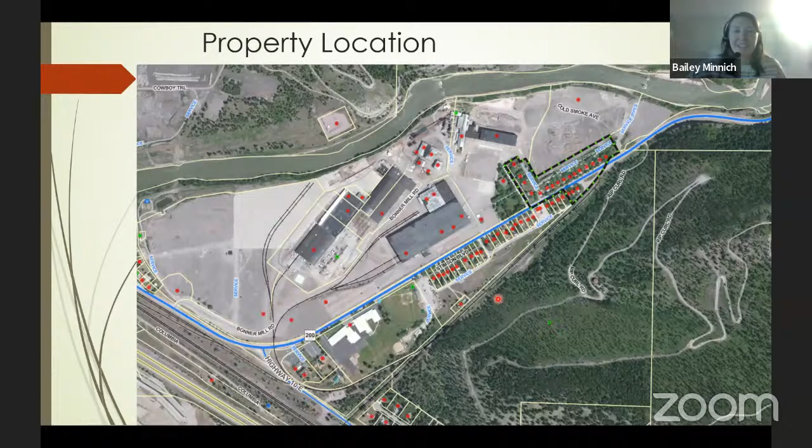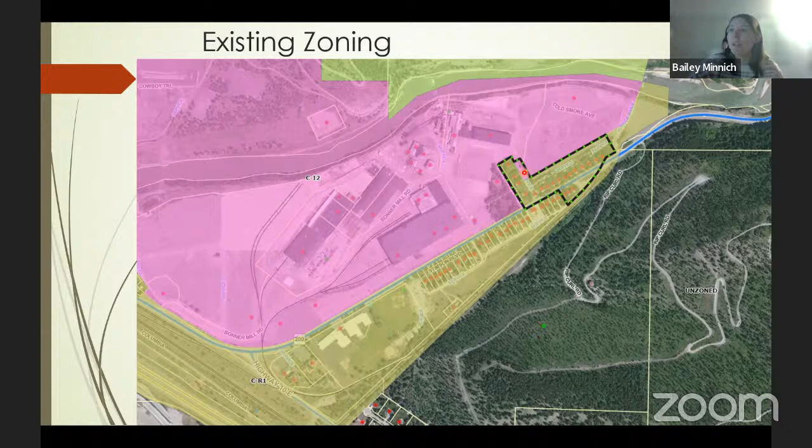The land use designation - so the 2019 Missoula area land use element, which is an amendment to the 2016 Missoula County Growth Policy, designates the property as neighborhood residential, which has a residential density of 8 units per acre or greater. And then the part that's zoned industrial has a heavy industrial center designation, which has building sizes ranging from moderate, at 20,000 square feet, to very large, over 150,000 square feet. Again, it's a tiny little portion of the property that I'll show in a minute. There's no buildings or anything on there, but it's interesting to know.

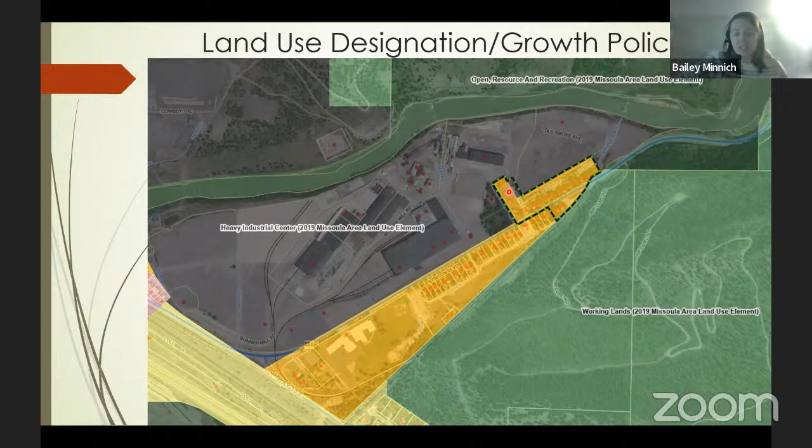Each of the lots have an existing home on them, constructed around 1925 as part of the Bonner Mill site development. There's an existing shared multi-user septic system, which will remain within the proposed common area, and all the lots are served by the Bonner Homes West LLC water supply. There is an existing alley that's located behind the homes on both sides of the highway, providing primary access to the lots. So the lots do front on the highway, but they do not have driveways or anything like that onto Highway 200.

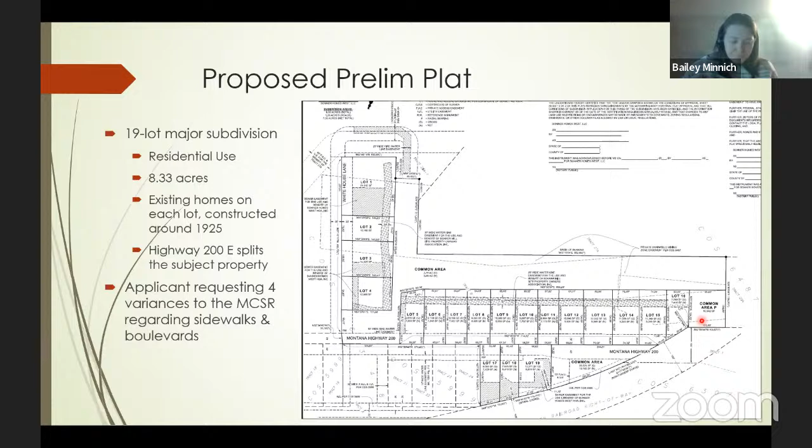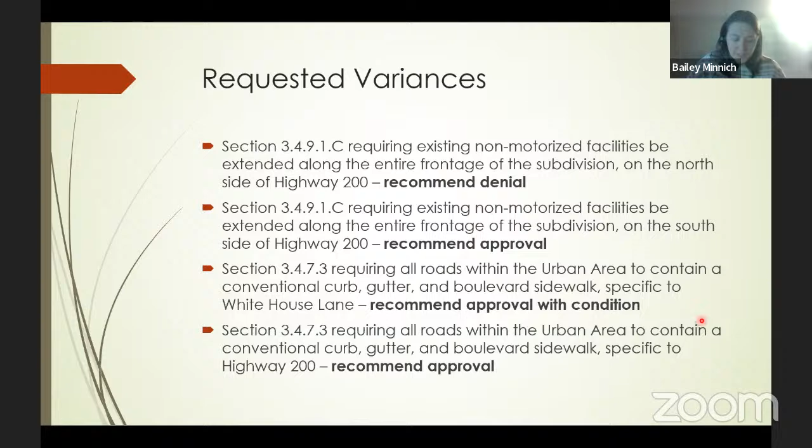So I think I'm on to my variances here. There are 4, as I mentioned, and I've got some pictures to help explain these, because generally I am recommending approval of all of them other than one. That is the extension of the sidewalks along the entire frontage of the subdivision on the north side of Highway 200.

There's potentially some issues with topography in this area. However, without the sidewalk extension, really the proposed park in this area is supposed to be able to be accessed by all residents within the subdivision. That's its intent, right? To meet the Parkland dedication requirements, it does need to have a safe access to it. So without that sidewalk extension, the park wouldn't be able to be adequately accessed by all residents within the subdivision.

Additionally, one of our variance criteria is that the variance would not violate our zoning resolution or conflict with our growth policy. Based off of our 2019 land use element, that does state all roads within this neighborhood residential designation should provide non-motorized facilities. Also our growth policy has goals and objectives promoting healthy communities and the expansion and maintenance of trails, pathways, and sidewalks.

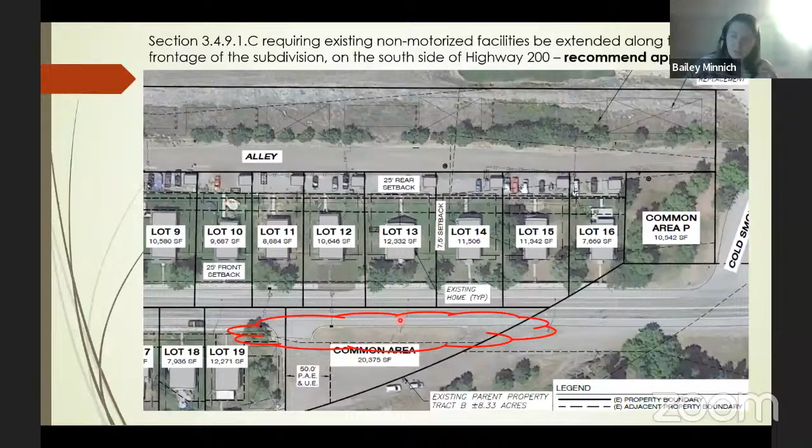And again, it's not going to any new residential homes. There's no existing infrastructure on this side in the remaining portion of the highway. So I am recommending approval of this variance request.

So they're asking to deviate from the standard since it would require reconstruction of the entire length of the sidewalk. There are existing mature trees located between the sidewalk and the existing residential homes. Installing a wider sidewalk in this area would require the removal of all those existing trees along the front, and would reduce the front yards along White House Lane.

To maintain safe and adequate access for all pedestrians, the applicant is proposing to repair the sections of broken sidewalk and curb. So we are recommending approval of this request, but I do have a specific condition proposing the repair of the sections of sidewalk along White House Lane, so that at least it is up to current standards as far as construction, not necessarily width.

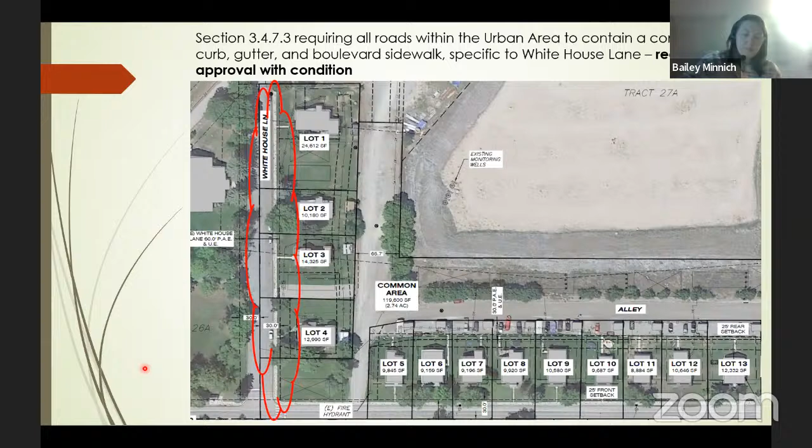The applicant did reach out to MDT to find out if there are any projects coming up for this area. There is a tentative project planned in FY2023 that would modify the 3 crosswalks out here and install some ADA ramp upgrades, but they wouldn't be extending or replacing or doing anything with the sidewalks at this time.

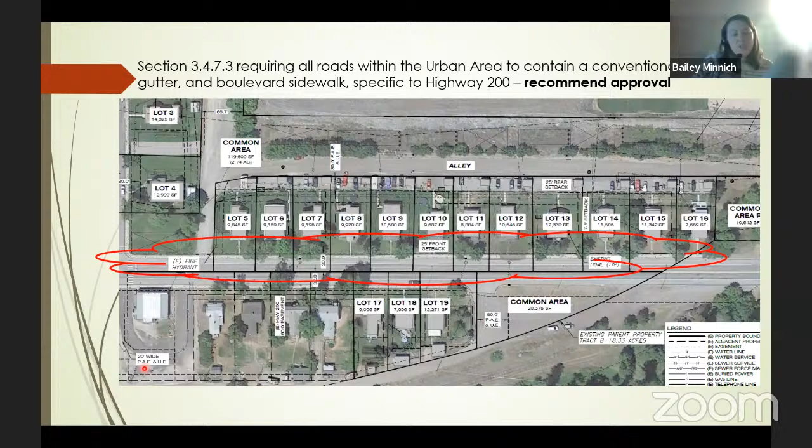So, yeah, we are recommending approval of that one. This is just a summary of the agency comments—I actually went over them in my discussion here. We did notify adjacent property owners by certified mail, published legal in the paper, and posted a poster out there on site. I've had no comments on the project at this time at all.

So for that, I have 5 recommended motions, mainly because there's the 4 variances and then the overall subdivision for each one. I can go into more detail if you guys want me to.

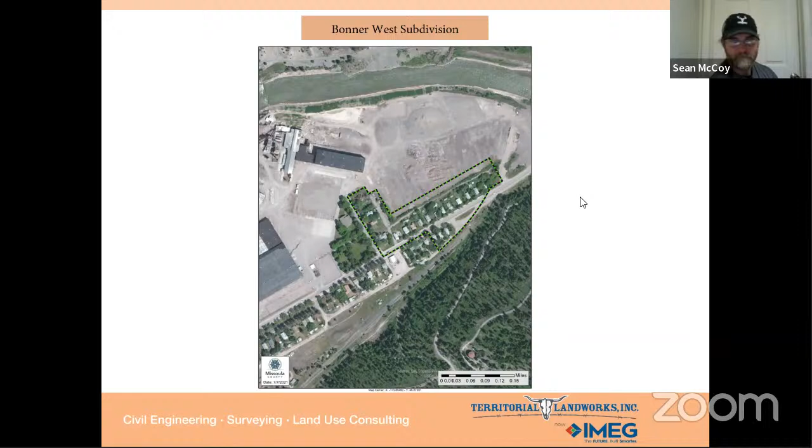All right, I'll try this one first. You guys let me know if you can see slide 1, Bonner West subdivision. I can see it. Okay, and now let's see if I can do a cool pointer option like Bailey. Let's see—do you see laser pointer? Anyone? Do you see a laser pointer on the screen? Yes, okay, perfect.

Well, first and foremost, wow Bailey, thank you so much for your thorough presentation. I'm always pleasantly surprised when CAPS gets on here with their presentations because they truthfully cover most of the material that I plan on covering, so it makes my job really easy. I'd like to thank the members of the planning board for being here tonight, and I don't know if we have any members of the public who've come to voice their opinions regarding the proposed subdivision, but thank you if we do.

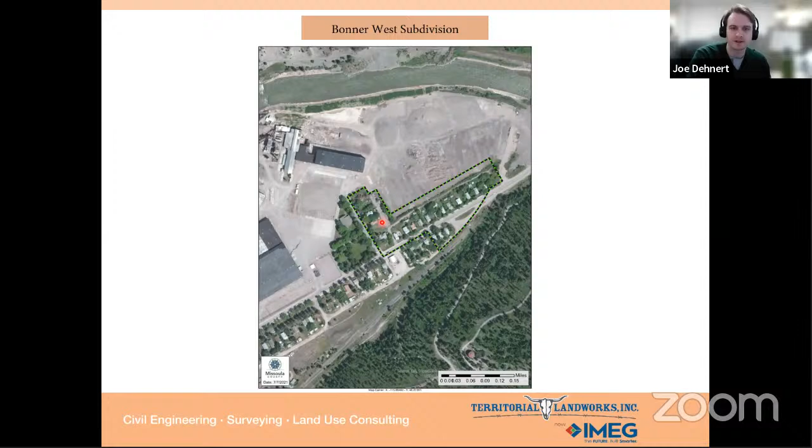For brevity's sake, I will try to zoom over most of the things if I feel like Bailey covered everything I need to say. So let's see if I can change slides. Hopefully that worked—this is just a brief overview of the processes that brought us here today. So way back in May, we had our pre-app, and Bailey has been with us from the start on this. As you can tell from her thorough presentation, she probably knows this project as well as we do.

But after that, we had our neighborhood meeting. We submitted our first element in August of last year, submitted a second element review—there were some element deficiencies on that first submittal.

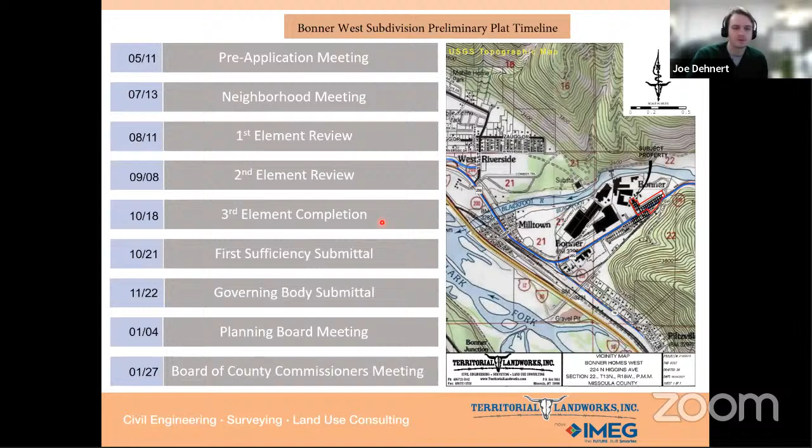We were deemed element complete in October. After submitting our first sufficiency submittal, we were deemed sufficient for a governing body submittal in November. And obviously we're here today for our planning board meeting, and we have the Board of County Commissioners coming up on January 27th.

Like Bailey covered, and I'll briefly go over it, you can see from the existing conditions out here that almost all the infrastructure involved in the subdivision already exists. It's worth mentioning that the purpose of the proposed subdivision is to create individual parcels around the existing homes so they can be sold as real property rather than continuing to operate as investment rental units. If approved, this subdivision would offer residents the option to be homeowners in the growing Bonner community, which offers proximity to recreation and serves as a commuter community for those working in Missoula.

So I'm going to glance over this. We are in compliance with the land use element, we are in compliance with the growth policy, and we are zoning compliant. There is that weird little section that's always entertaining in the industrial side of the property.

And I'm going to briefly go over these variances. Bailey, you did a phenomenal job, you covered them in depth. I'm not going to cite the specific sections, but essentially it's 4 variances all relating to the same thing, like Bailey said. The first variance seen on the screen here is the one she was referencing for the north of Highway 200.

Just to clarify, the denial of this variance would require MDT approval for construction within the right of way. At this time, our conversations with MDT have indicated that they would require an approach permit, that they would prefer to have a maintenance agreement with the county for any new amenities within the right of way, and also that the plans be reviewed by County Public Works.

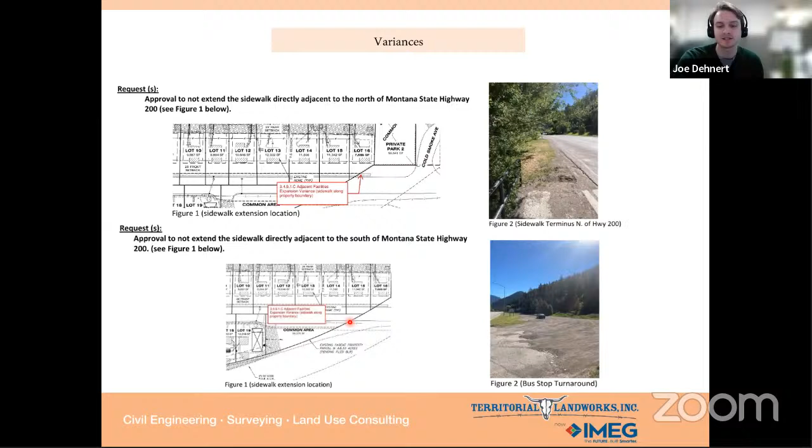Here are the next 2 variances. The first one relates, like she said, to White House Lane. The variance we're proposing is basically from the requirement of the boulevard, like she said, and the requirement of the sidewalks to be 5 foot in width.

Bailey has included in her staff report that a condition of approval for this variance be that the developer repairs the existing sections of broken sidewalk and curb infrastructure along White House Lane, as she mentioned, and we see absolutely no issue with this being a condition of approval.

The second variance here is the one she was referencing along the south side of Montana State Highway 200. Once again, there's already existing infrastructure that provides safe, adequate access for pedestrian travel. Additionally, there are existing and mature trees along White House Lane, which would have to be removed to facilitate a sidewalk expansion, which could result in the reduction of existing front yards and create non-conforming structures regarding setbacks. So we do believe this variance should be supported, and that's also validated by Bailey's recommendation for approval.

This just gives a closer look at the plat that Bailey had up about some of those access easements for the proposed subdivision. On the left here, we see the 40-foot emergency fire access easement, which will serve as the emergency access vehicle turnaround for the alley, which connects to White House Lane via this easement.

A draft fire suppression easement agreement has already been drafted, and the plan is for that to be filed prior to final plat approval. As part of this easement agreement, the emergency service providers will have keyed access, granting them use of the easement running through the Bonner Mill site.

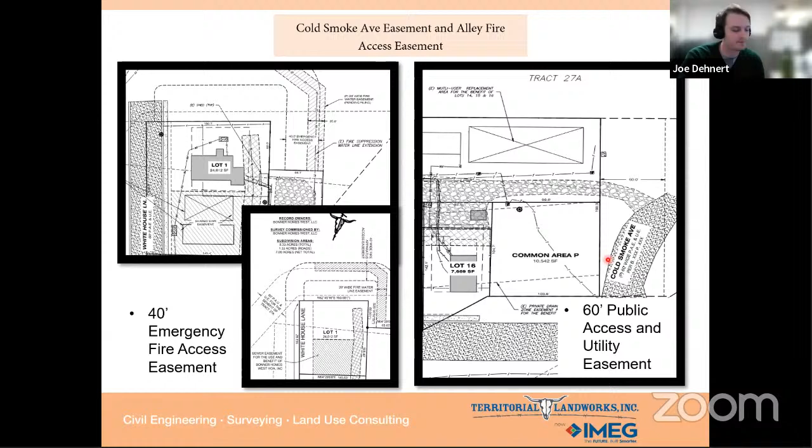It's worth mentioning here, Bailey talked about some of the fire suppression systems that we have in place out there, with the high pressure well and the cistern. The subject property is within the Missoula Rural Fire District, and it's approximately 1 mile from that new station.

The existing system consists of that large production well and that large cistern located on the hill to the east of the proposed subdivision.

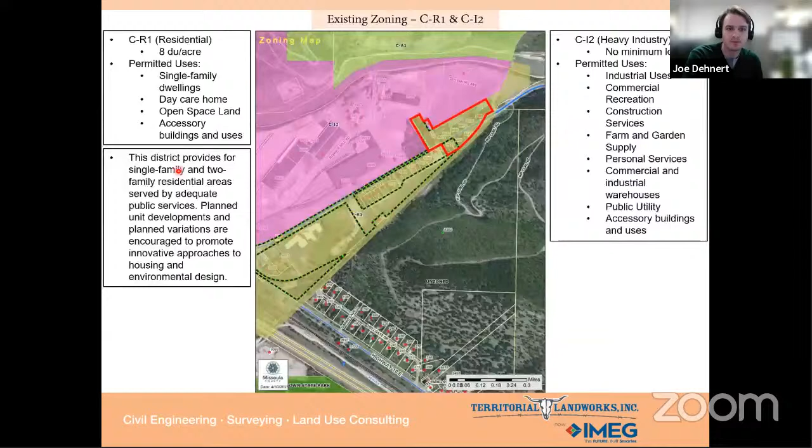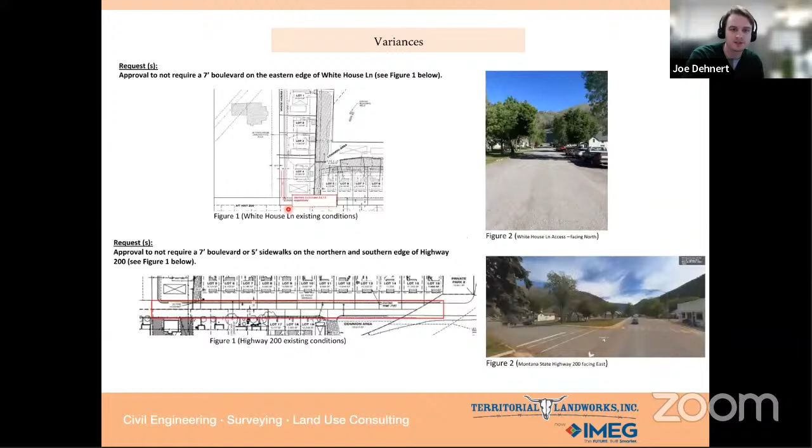There are existing water main lines that supply water to the existing hydrants along Highway 200 and White House Lane. These images show where new hydrants have actually been installed. This is the alley that runs here, easier to show on the existing condition. This alley runs here, and this is where that fire hydrant is located, and the other one next to it is located up here, as you can see in this photo. And there's already been a fire hydrant installed along the east side of Stimson Boulevard.

These plans were reviewed and approved by the Missoula Rural Fire District.

Bailey did a phenomenal job, and I'd like to thank everyone for their time and consideration with this project. I'd like to make myself and also Dan Foltz and Mike Heisey available for any questions you may have. Thank you very much.

Great, thanks, Joe. Did I stop sharing? No, well, yeah, you did. Okay, good, good.

Thank you very much, that was a good presentation and a little more information for us to consider. I believe that's all the presentations we have at the moment, and that will lead us into the public comment period of this part of the public hearing.

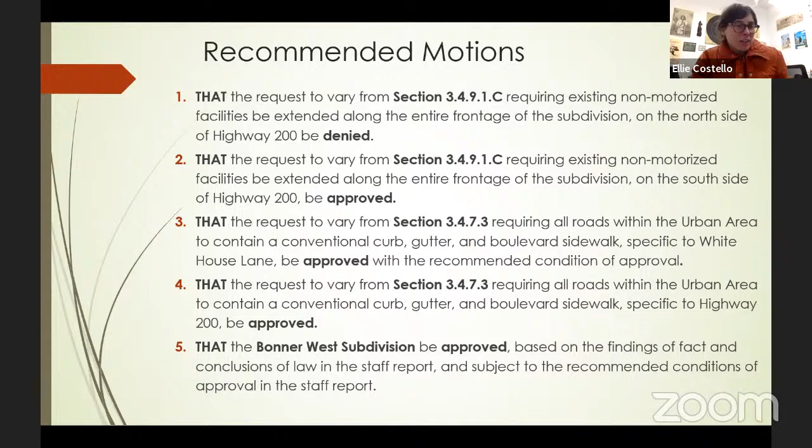I'll second that for condition number 10 amendment, and number 5 as Josh read it out. We have a second from Ellie on the motion and the amendment for condition 10. I think we'll do a roll call vote on this one, just to make sure. Donna, could you take that away, please?

Certainly. Josh Schrader votes yes. Dave Loomis votes yes. Sierra Farmer votes yes. Toon Pham votes yes. Ellie Costello votes yes. Shane Morrissey votes yes. Sean McCoy votes yes. Motion carries. Thank you.

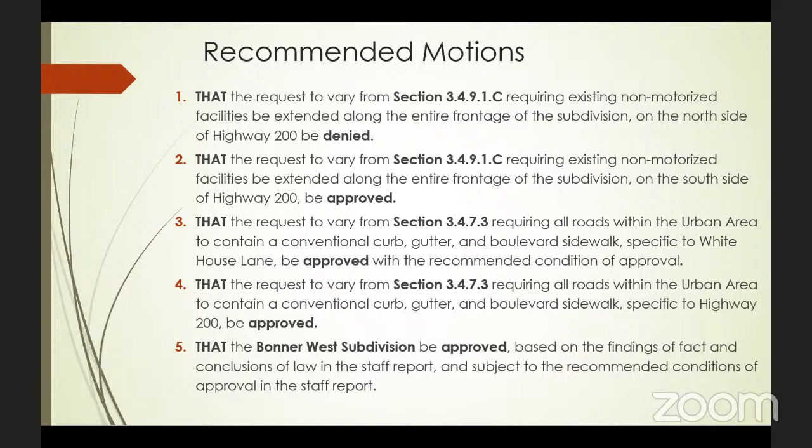All right, folks, I think that brings us to the end of that public hearing section. I don't think we have any more under that. Let me get back to my agenda. Okay, yeah, that wraps us up with that. Thank you very much, Bailey and Dan and Mike and Joe, for all of your time and attendance. Oh, I see, I'm not sure, Mike and I think it's Dan, your hand was up.

Yeah, thanks, Sean. Mike just wanted to add a comment real quick. I just wanted to thank each one of you for taking time out of your evening to do this for us. And I truly appreciated the discussion, the comments, well thought out, good questions. And I truly appreciate the way you approached number 5. That was, yeah, I appreciate that. So I just wanted to say thank you. Great. Well, thank you. Appreciate that, Mike.

Okay, all right, well, that brings us to the end of that portion of the meeting. Our next agenda line item is communications and special presentations, which we do not have any of tonight. And committee reports, I believe we don't have any either, Toon. Okay, perfect, moving right along. I don't believe we have any old business.